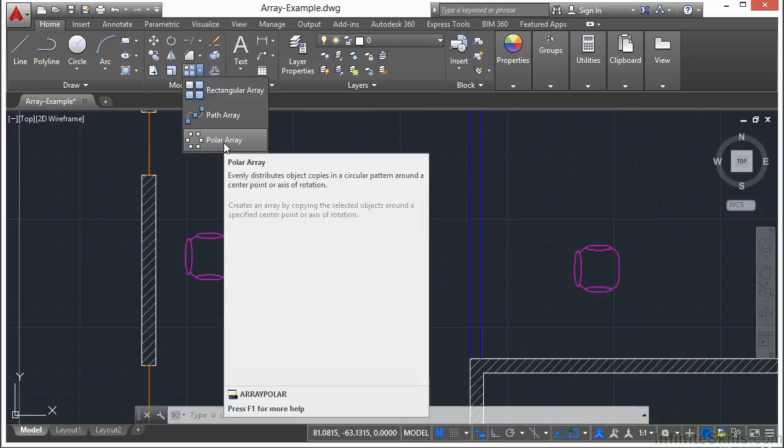So let's pick the chair, press return. And now we have to specify the center point of the array. That's going to be the center of this circle right here. And you can see, boom, it just pops them right in there for us. Now, the polar array works almost identically to the rectangular array. You get a contextual array ribbon called the array creation, and you have all these other options available to you.

You also have grip edits that you can change the angle with. You can also change that length right here. Once you do that, you can change the number of chairs or objects that will be arrayed in that area. So if I pick this here and I stretch it enough, it'll go and keep everything really close, really tight, or 360 degrees. Of course, all of these controls are up here and available to you. So I can control the number of items.

Let's say it's 5. I can control either the angle between them or the fill angle total, whichever one I would like. So if I say this needs to be 180 degrees, and there are 5 of them, they're going to be 45 degrees apart. Or I can go to 360 degrees, back the way I had it. And I can change this number here. Say I just pick randomly 56. It'll change the fill number for you automatically. So it just depends on what you want to do.

Now you can change the number of rows. So let's say I need 2 sets of chairs. If I type in 2, it will give me 2 chairs. And all of the items are going to come out radially. Now levels is for a 3-dimensional polar array. So this will stack chairs on top of chairs. In this case, I only want the 1 row though.

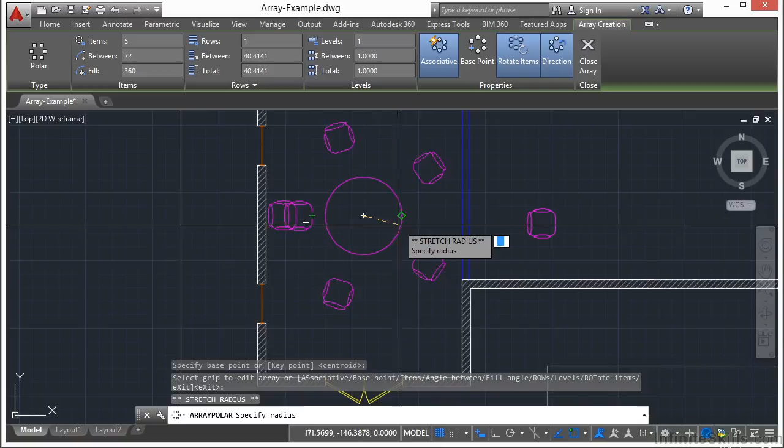Now I do have a few options here. I can change the direction. I can rotate the items or not. This way the chairs, as you can see, are all facing the exact same direction. Well, I want them to all face the table, so I'm going to leave that on. I can change my base point this way if I'd like, and this makes it associative. If I turn that off, then I won't be able to edit the chairs as a group later on. Once I change this, it shows how far away my chairs are from the center of my base point option. I'm going to undo all that and start all over.

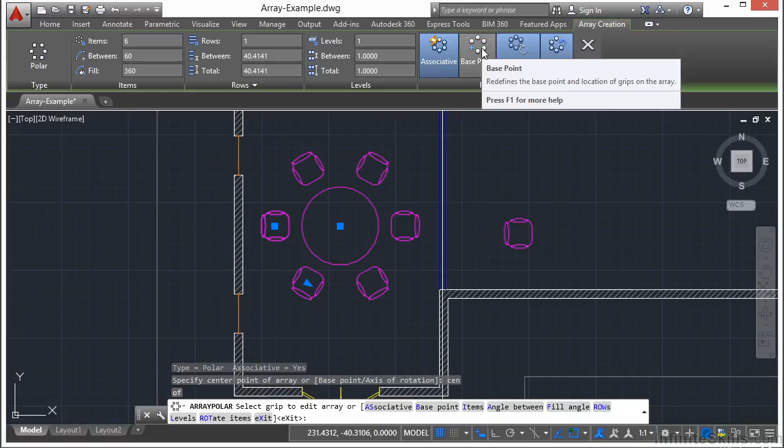If I go to my polar array again, select my chair, press enter, select the center of my table, and I get this all right here. So it's actually very simple to do and very quick, as you can see. Now, if you change your base point, that's going to redefine where the location of the grips are going to go. Now, when I'm done, I click close or press the enter key, and I have an associative array again.

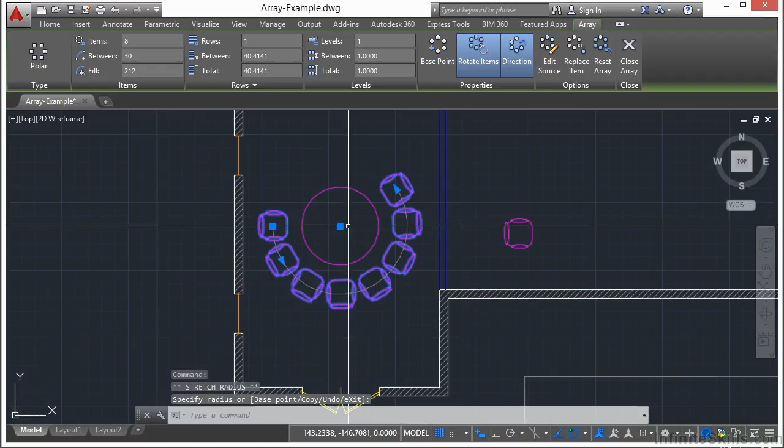Once I select it, I get my contextual ribbon back, and I can make all the changes that I want to here as I'd like. I can also change some of these options here with my grip edit, just as I did before. I can stretch these out, make them a little closer, a little farther away, and here, this grip will let me move them as a group.

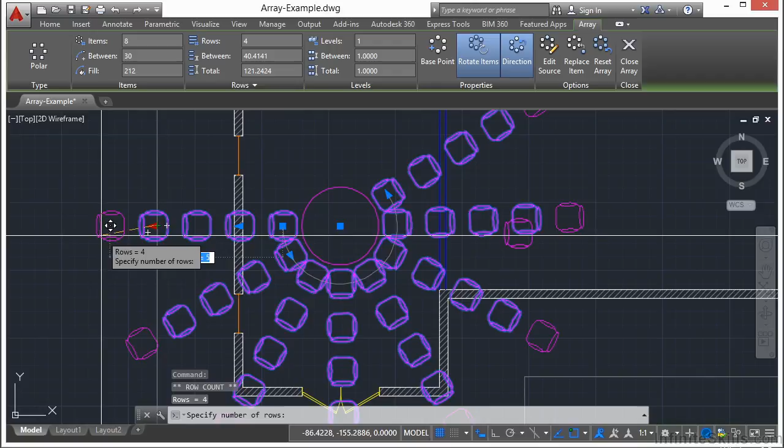If I hold my mouse over my grip edit, I have a couple of different options. I can change my row count and get a lot more chairs. I can change that radius. And then once I have multiple rows, of course, I can change those grips this way as well. So that's the polar array. It allows you to make polar radial objects very quickly.